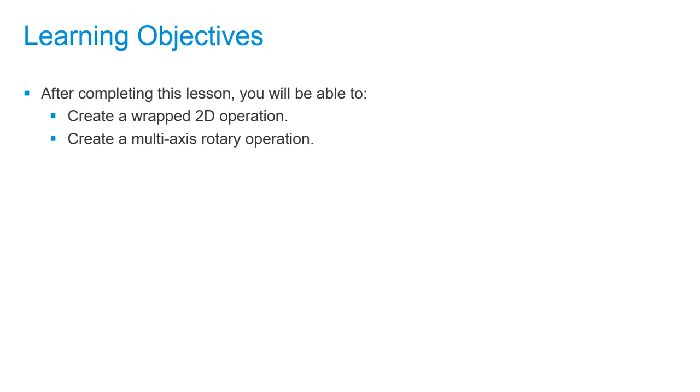In Fusion 360, we're going to take a look at two new files, rotarywrap.f3d and rotary.f3d. We're going to explore different types of fourth axis operations. The first, rotary wrap, is going to take a look at using 2D operations such as 2D adaptive clearing, 2D pocket, and 2D contour, and unwrapping and rewrapping those to a revolved part.

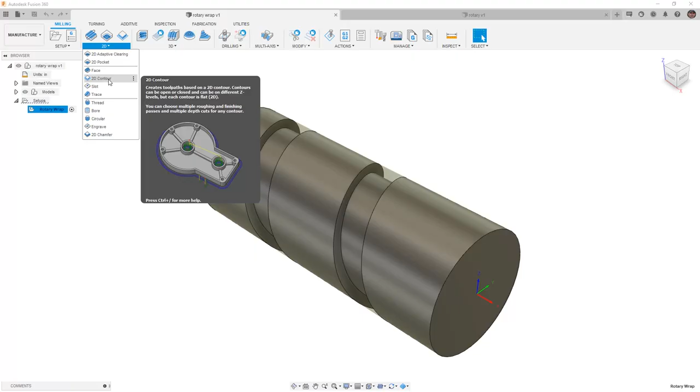There are some limitations to the wrap functionality. It must be a truly cylindrical part. It can't be tapered, and it has to be a true cylinder. But what we're going to do is use 2D adaptive clearing to clear out this wrapped pocket.

We're going to start by selecting our tool, and in our multi-axis tool library, we want to use our 1/4 inch flat end mill with aluminum roughing.

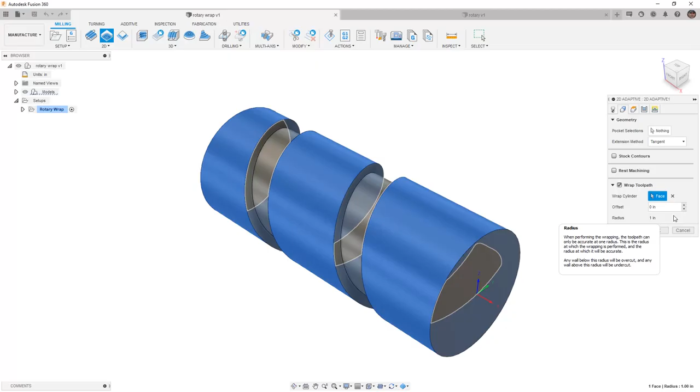Inside of our geometry section, the first thing we're going to do is use the wrap toolpath option. I'm going to select the outside of the cylinder so that it knows it has a 2 inch diameter. This is important for it to unwrap and rewrap the toolpath.

The next thing we need to do is select the pocket. This is going to be the base or the root of that wrapped pocket. I'm going to zoom out so we can see exactly what happens when it starts to calculate.

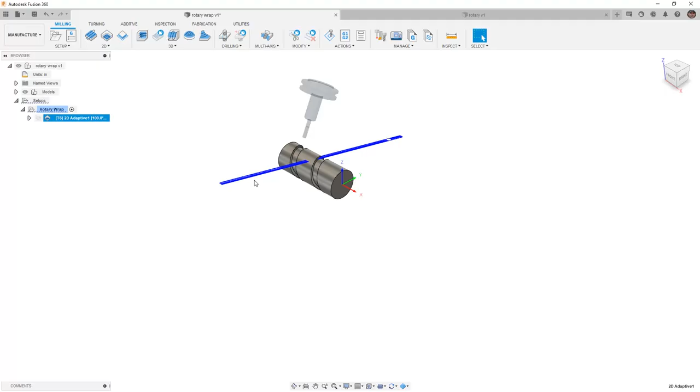For our passes, I'm going to turn off stock to leave, but use all the other default settings and say OK. As soon as it starts to create this operation, you can see that it's creating a 2D adaptive based on a flat part and then rewrapping it around our cylinder.

If we take a look at this in simulation and manually drag it over, you can see that it's using that adaptive operation and rotating around the part.

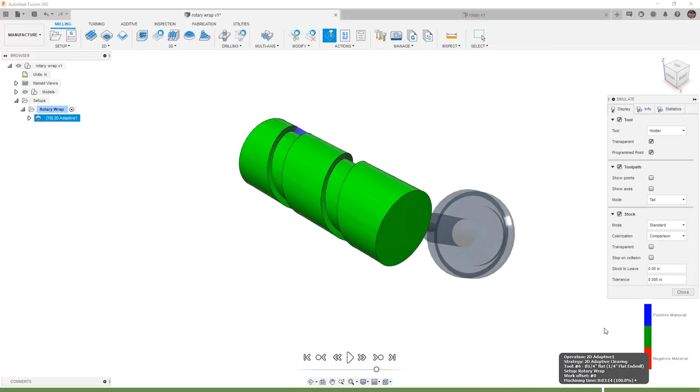Now, again, this is not truly how it's going to work on a machine. The adaptive motion is going to be moving in X, Y, and Z. However, the part itself is going to be rotating about the A axis. So it's extremely important that the coordinate system is set up appropriately, so that the x-axis is the rotation axis and z is pointing up at the spindle of the machine.

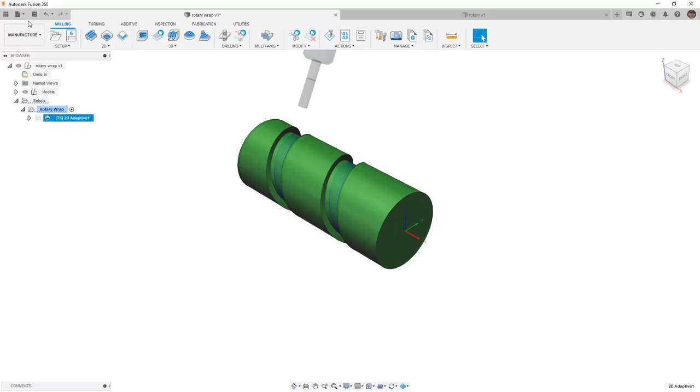Let's go ahead and save our rotary wrap, and we want to move on to our rotary toolpath.

Rotary is a true multi-axis toolpath. You'll notice it has this small icon on it, meaning that it's an extension. An extension must be purchased, so in order to do this, you have to purchase an extension option.

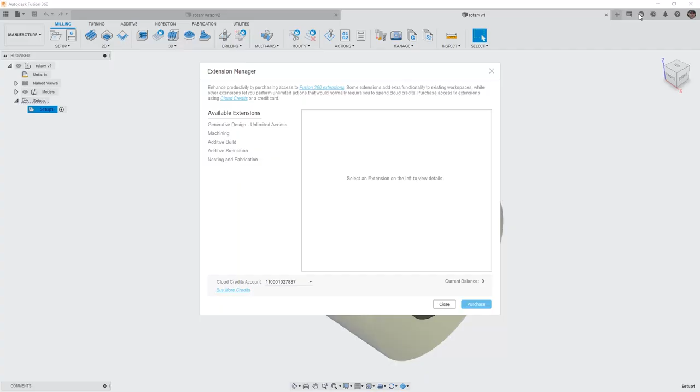I'm going to take a look at the machining extension, and I'm going to be using the purchase 1-day option, which is 25 cloud credits.

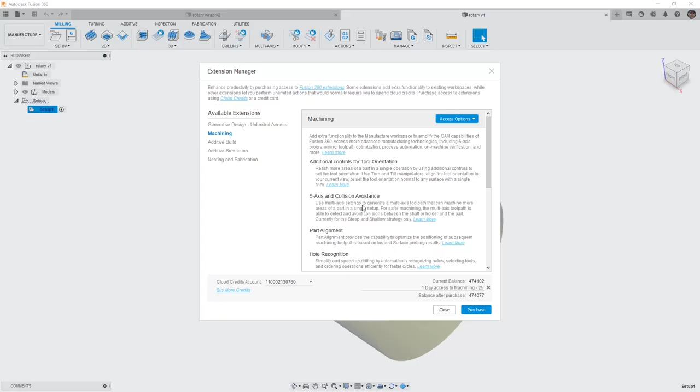In order to do this, we get access to a whole host of different strategies. We have steep and shallow, we have 5-axis and collision avoidance, and many other things that are extremely helpful to multi-axis machining. But once again, this is a purchase option, meaning you'll need to purchase the extension.

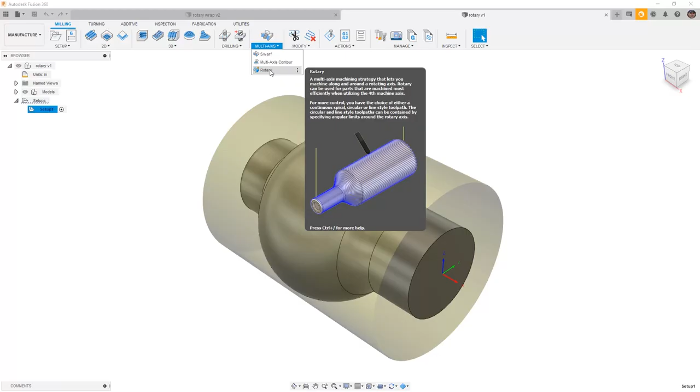Oftentimes with these extensions, the first time you access them, there'll be some sort of trial period and you can play around with all the options. For our purposes, I am going to use that multi-axis rotary, but again, you don't have to purchase it. You can see how it works here and see if it's useful to you.

We're going to select a tool, and in this case, I'm going to be using my 1/2 inch flat end mill, tool number 7, with aluminum roughing.

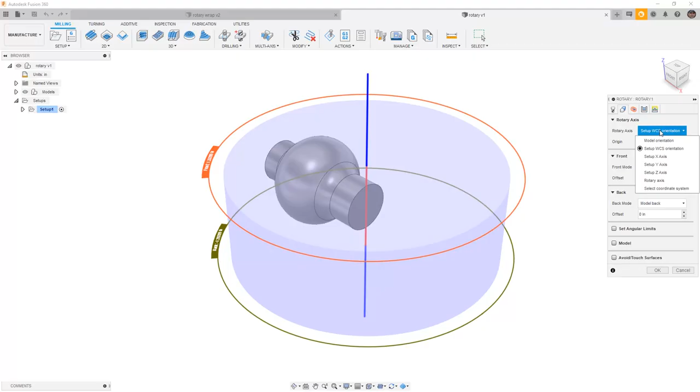In the geometry section, this is important because we need to set up the rotation or the rotary axis. We want to make sure that the rotary axis isn't based on our WCS setting. In this case, we need to make sure that it's revolving around the x-axis, so we can set up our x-axis. You can see here that it's now using the x or the revolved axis.

Also note that we do have some angular limit options that we're not going to be exploring here, but we can dictate whether or not we want it to start and end in a certain orientation.

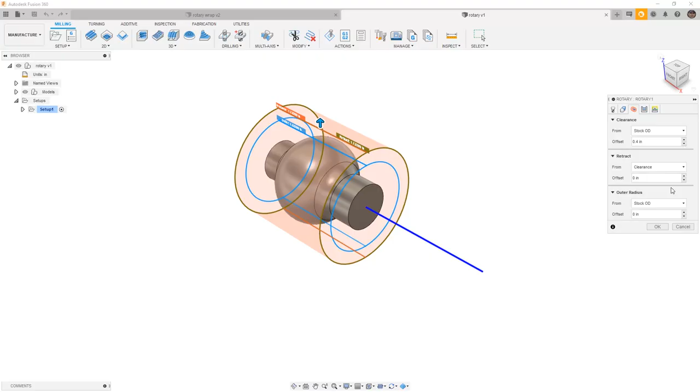Because this is a rotary or a revolve type operation, the stock settings look more like they do in a turning operation, and we're going to leave them as default, but these will dictate things like our clearance, our retract, and our outer radius. For our passes, there are a couple things that we need to dictate.

Our rotary passes are based on a spiral, based on a linear or a line view, or a circular. If we do a spiral, it's going to be going around the part as if it's a thread.

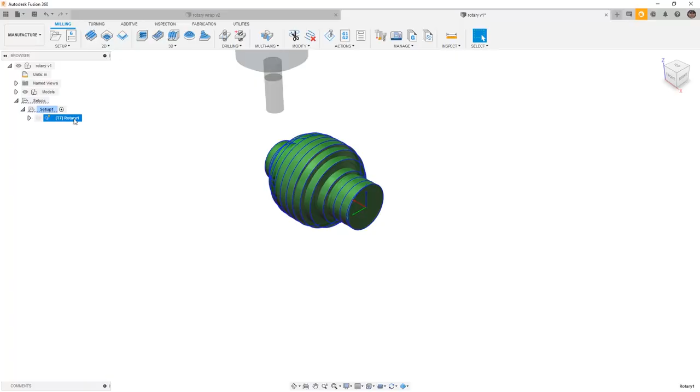If we go back in and take a look at our line option, it's going to go back and forth along the x-axis as it's removing that material. You can see that this gives us a pretty close representation of the geometry.

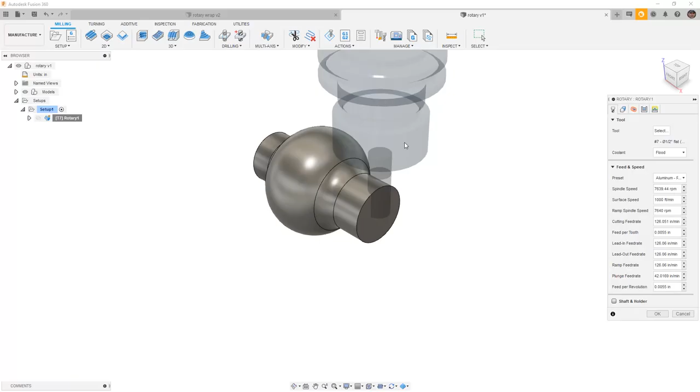That third option that we have in the passes section, using a circular, will allow it to go around and then step over in the x direction as it makes its passes. So this is not going to give us the cleanest option for this geometry. In our case, using the line option is going to give us the best representation of our geometry.

You could also use a rounded tool like a ball end mill to get much closer to the final shape. But you can see even in this case, the flat end mill gives us a pretty good result.

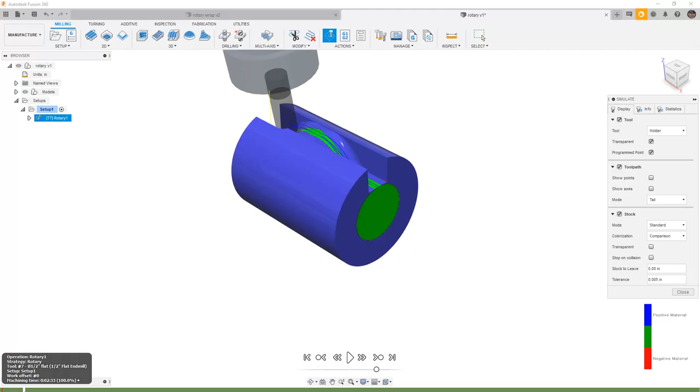Let's take a look at this and simulate so we can get a better idea as to how the tool is moving. You can see that the tool is moving in X and Z simultaneously, and then it's rotating the part about the A axis as it does this again.

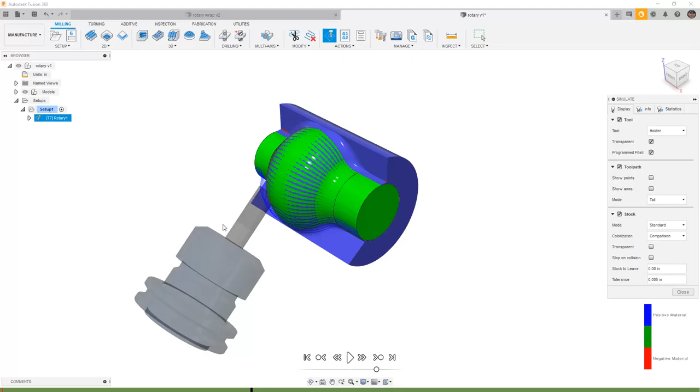In a situation like this specific toolpath, how we're using it to cut is only moving in X and Z, and then it's rotating about the A axis to its next position. If we were to use the spiral option, it would be moving in X and Z while it's constantly rotating about the A axis. So we have to keep in mind again the orientation of our X, Y, and Z and how critical that is to our fourth axis positioning.

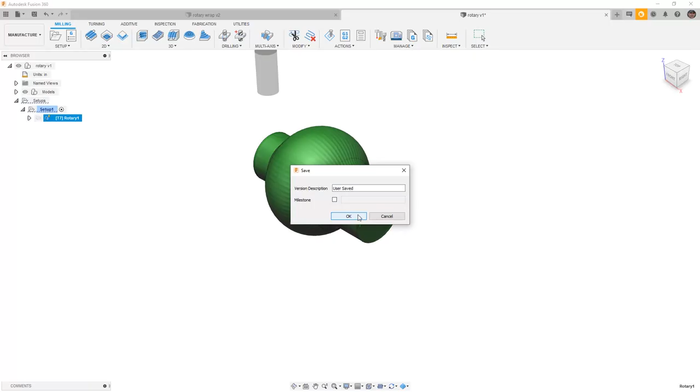Once again, this is an extension option. If you want to learn more about the extensions, you can always go into your preferences, into preview features, and go to your workspace Manufacture and just look at what's available with the extension add-on.

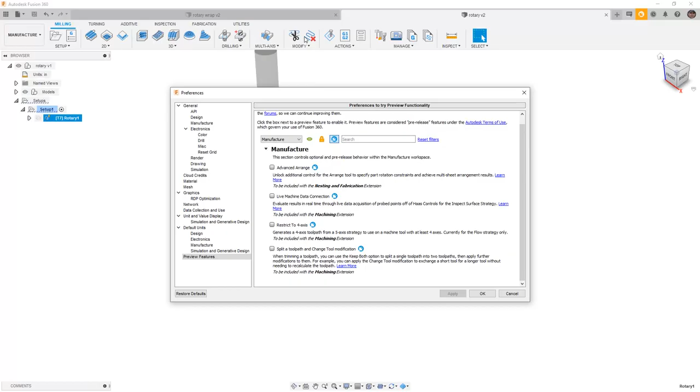There are advanced arrange, we've got live machine data connection, restrict to 4-axis, split a toolpath, and change tool modifications. These are things like trim toolpath and delete. And all of these options come available to you when you purchase the machining extension.

You can also come in here and take a look at each of these. And there's also a Fusion 360 extensions link that tells you more about each of them.

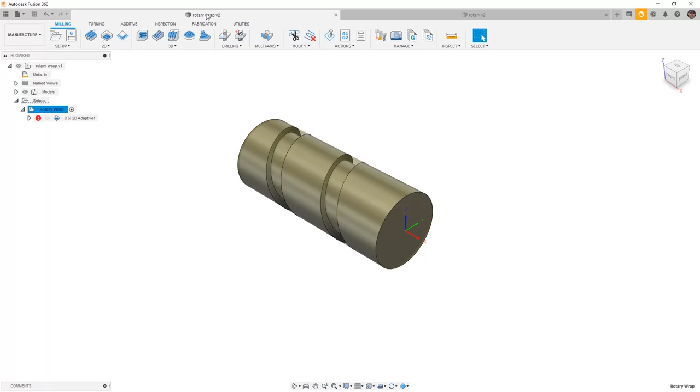For right now, let's make sure that we've saved rotary and rotary wrap. And if you haven't purchased the extension to play around with rotary, you can also explore some other options that you have and try to machine this geometry with some of the existing toolpaths. Once you've saved these, let's go ahead and move on to the next lesson.